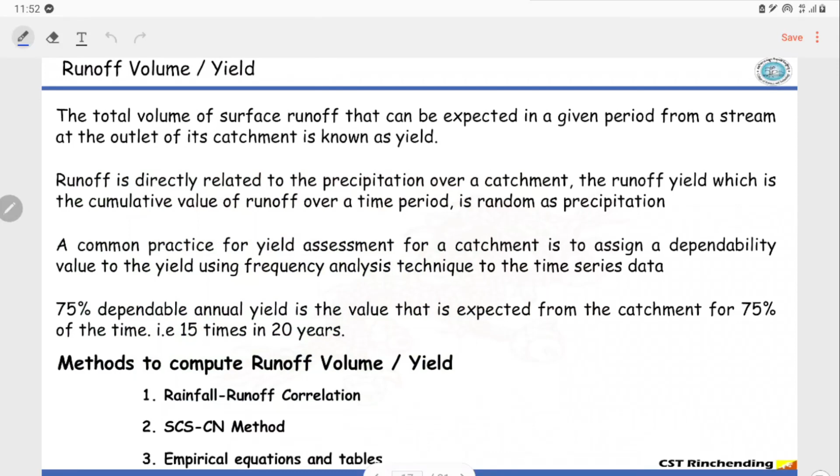So in today's lecture, we are going to discuss the runoff volume, also sometimes known as yield. As the rain falls over a catchment, after it satisfies the initial abstractions, the remaining water flows into the stream and eventually drains into the ocean, right? So how much water is being carried by a particular stream or river is what you call the runoff or yield of that river.

And like precipitation, this runoff is also random, because runoff is generated by a random input. Precipitation is random, and because of precipitation there is runoff. There is seasonality, but still the runoff is random. So instead of using parameters like average runoff, people usually use the term dependable yield.

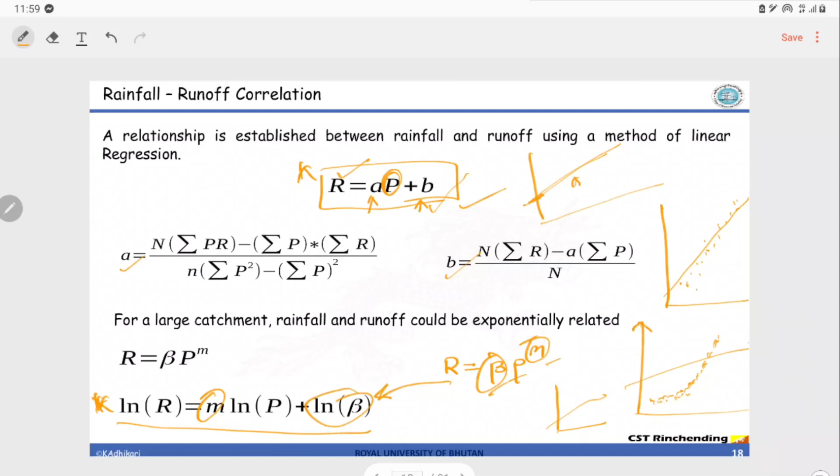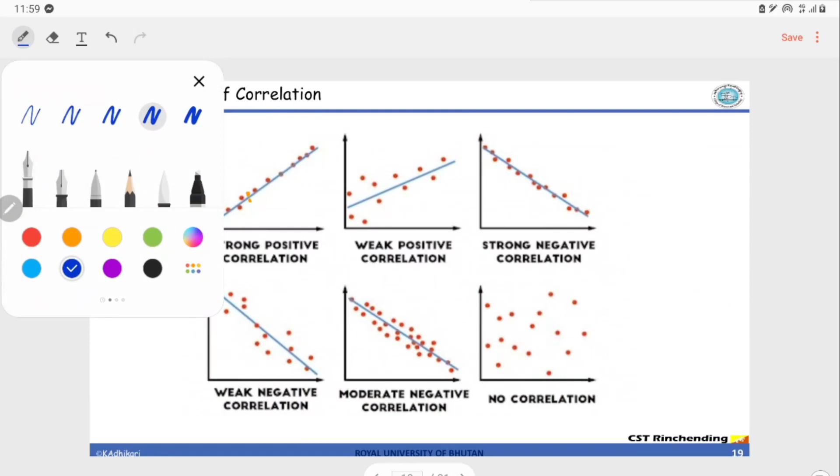Now let's look a little bit deeper into this concept. Let me use a different color, blue, a thicker one. If your data points are very close to this trend line, then we say positively correlated. Positive because when x value increases, y value increases. If the data points are not very closely located with the trend line, then we call it weak correlation. And we see the trend line: if y is also increasing with the increase in x, with the increase in precipitation the runoff is also increasing, then we call it weak correlation.

This case may not happen in rainfall runoff studies because this is absurd. Because runoff depends upon the rainfall. It cannot happen that when rainfall increases, runoff decreases. But if the data exists in this fashion, we say it is negative correlation. But for rainfall runoff studies, these conditions will never happen. This could happen depending upon the catchments. It could be sparsely located where you cannot fit a linear or a logarithmic trend line, but this kind of data can exist.

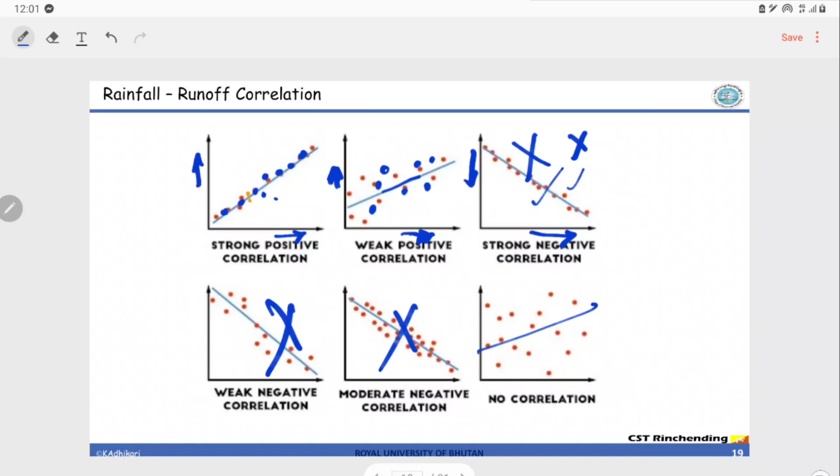But negative correlation, unless you are using the rainfall of one catchment and the runoff of a different catchment, which is absolutely illegal, there's no logic in it. So that time you may get this, but in the real world, for rainfall runoff correlation, you will never get this situation.

Now here we are on the SCS-CN method. It was first formulated by the Soil Conservation Service, United States, in 1969. Thereafter it has been widely used. In fact, like I explained in modeling, in most of the models it is inbuilt. The SCS-CN method is inbuilt in the model, so you can simply click to choose the method and then you can do the modeling.

It depends upon an assumption. It is a conceptual method, and it assumes that the ratio of actual retention, the catchment has some retention power, right? When there is rainfall, all the rainfall is not going to go as runoff. Something will be retained by the catchment. The ratio of actual retention to potential retention is equal to the ratio of actual runoff to the potential runoff. Now the volume of potential runoff would be equal to the rainfall, because potential runoff means if there are no losses, how much would be the runoff. So the volume would be how much rainfall has occurred, by mass balance, right? We can also use the concept of conservation of mass.

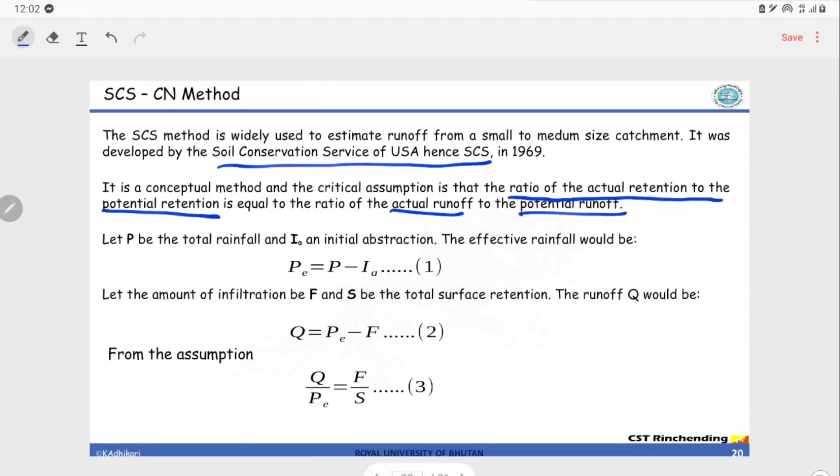So that much volume of water has come, that much volume of water has to leave, or else some mass is getting destroyed in between, which is not possible. So from here we have the first equation, that is the effective precipitation, which is the potential precipitation minus some losses, right? That is effective precipitation, effective rainfall we call it. Let's keep it as equation number 1.

And Q, which I'm saying as runoff, is equal to the effective precipitation, because I'm just subtracting the initial losses, okay? And then you have to subtract the infiltration losses. The initial losses and the infiltration together we call total losses, but here I'm doing it separately. So for rainfall, I'm simply subtracting the initial losses, because directly from the rainfall there is an initial loss, and for runoff, I'm subtracting the infiltration loss.

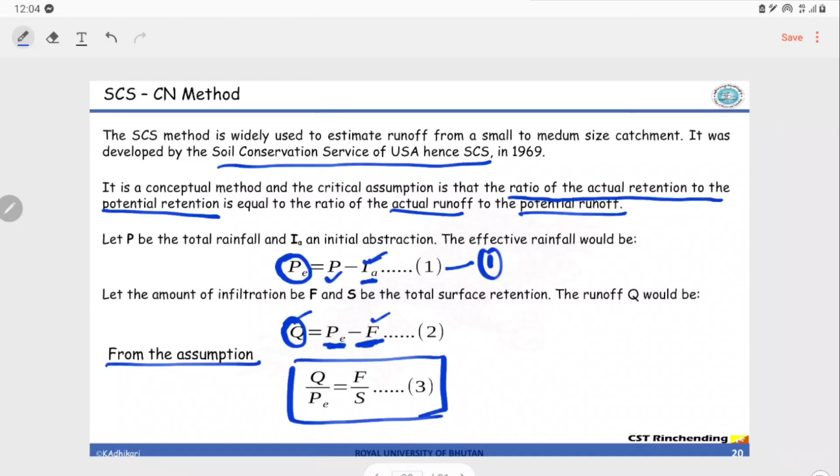So from the assumption, the ratio of actual retention to the potential retention is equal to the actual runoff to the potential runoff. From this assumption we can derive equation number 3. From this we again assume that initial abstraction is a fraction of potential retention. So here we are saying the initial abstraction is the total retention multiplied with a coefficient. What it says is Ia is directly proportional to S. Now Ia is equal to a coefficient times S. Okay, that's what's been done here.

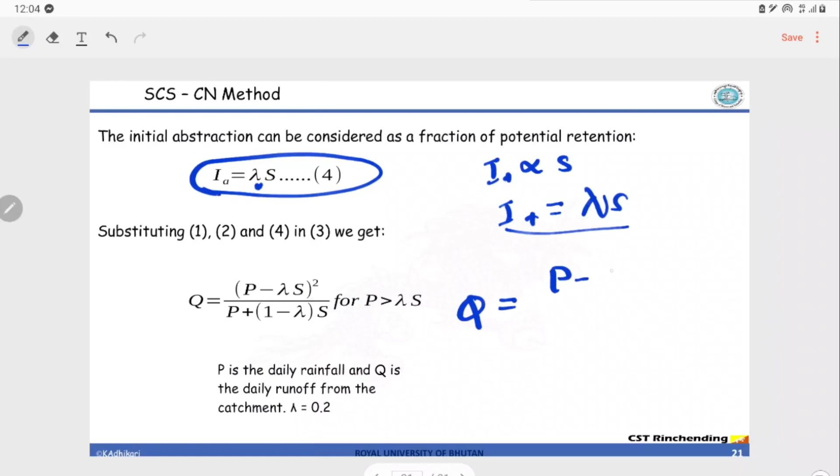Now using all these equations, we finally express our Q as (P minus lambda S) squared divided by P plus (1 minus lambda) S, where S is the retention, in other sense it is storage. And it is found from experimentation that lambda of 0.2 can be assumed. So in this equation you can simply substitute the value of lambda as 0.2. Precipitation, rainfall will be known. The only unknown value is the retention, that is the storage.

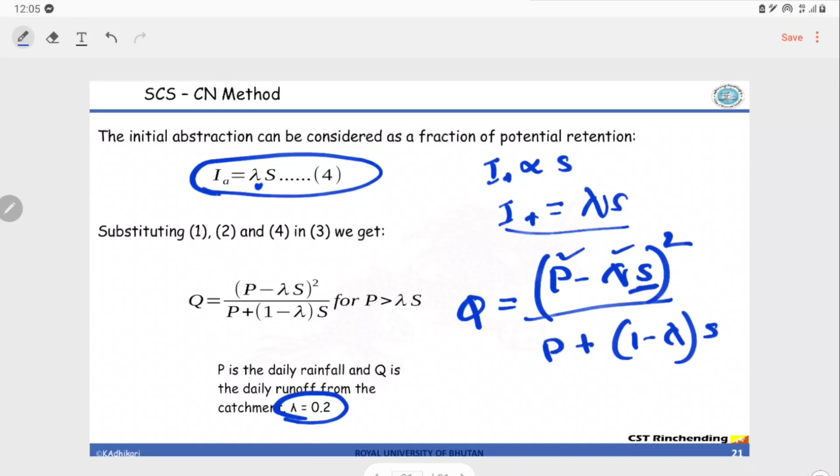Now a concept of curve number is used to calculate the value of that storage, and that's why it is called an empirical method, because this relationship has been derived from experimentation. You cannot theoretically derive this equation. It is derived experimentally by conducting many experiments in the field. So it is said that storage S is equal to 254 times (100 divided by CN minus 1), where CN is the curve number.

Now this curve number value ranges from 0 to 100, where 100 is for impervious surface. Impervious surface means there's 100 percent runoff. For natural surface, the curve number is going to be less than 100. For impervious, when there are no losses at all, we call it 100, or else it would be less than 100. This curve number depends upon the soil type and the antecedent moisture content of the catchment. We'll discuss what soil type and antecedent moisture content are.

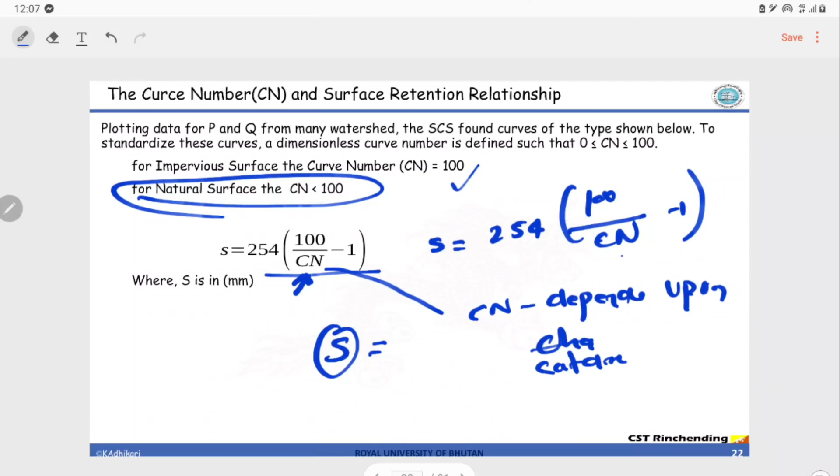So for now, what you need to understand is the storage S is equal to this function, whereby a new parameter comes, curve number. This curve number depends upon catchment characteristics. The curve numbers are usually available as a standard, so it depends upon what kind of soil and what kind of land use is there in your catchment. Depending upon this, the curve number is available in a tabular form.

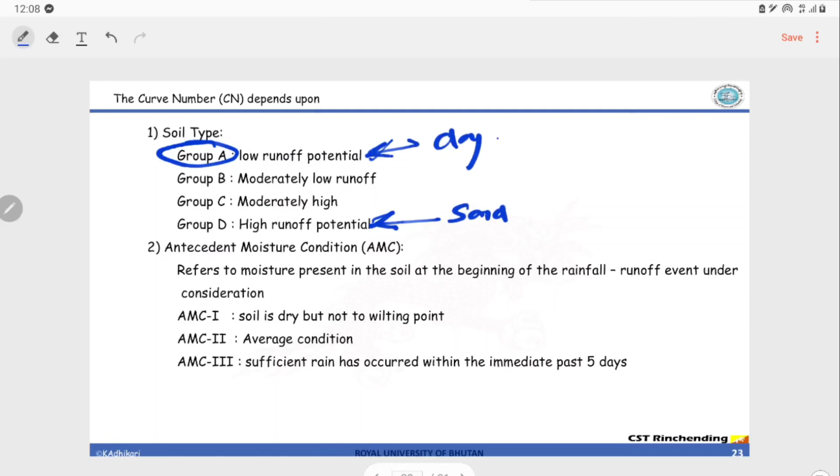And the curve number, as I said, depends upon the soil type and the antecedent moisture condition. If the soil is sandy, there will be less runoff, and sandy soil is classified as low runoff, under hydrologic group A. Hydrologically there are 4 categories of soil: A, B, C, D. A means low runoff potential. Sorry, the sand example that I was giving is for this one. High runoff potential is sand. This is for clay. If the soil is clay, then there is low runoff potential.

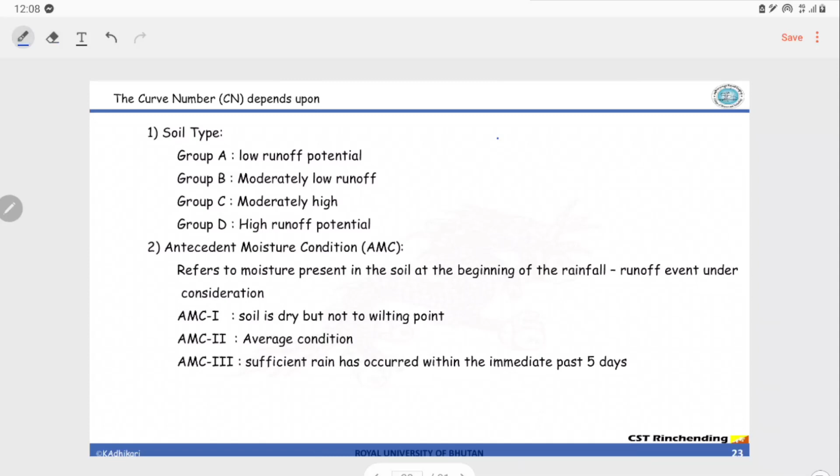Okay, let me repeat this. If the catchment area is sandy, because sand has a high potential of infiltration, the runoff will be less. So this is sand. If it is a clay type of soil or clay loam type of soil, then it does not have the potential to absorb the rainfall. So all the rain will drain as runoff, so it has high potential. So this is clay. Did you understand the logic here?

So once again, if the soil is sandy, it has a huge capacity to absorb water, which we call infiltration. So once there is precipitation over the sandy soil, a huge volume of water infiltrates, so the amount of water for runoff is less. So we call it low runoff potential. So it is classified under group A, sandy soils.

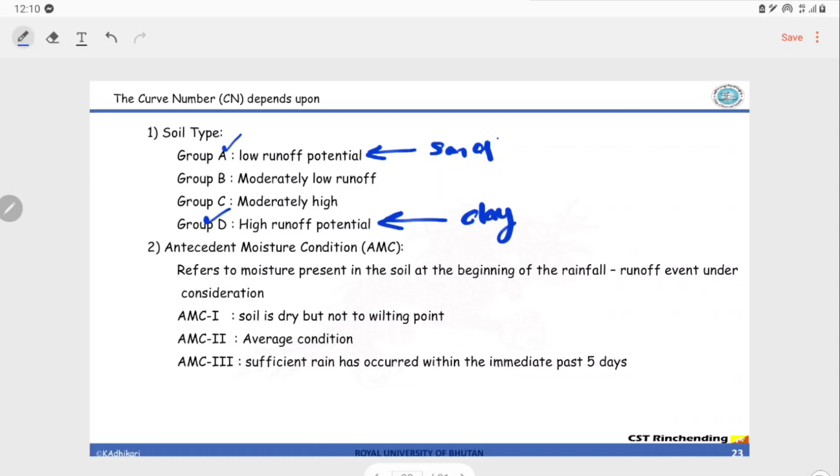And clay soil has less capacity for infiltration. So all the rainfall that is falling over a clay soil simply drains out as runoff. So it is classified under hydrological group D. Again, it depends upon antecedent moisture condition. Antecedent moisture condition means how much moisture was already available. Condition 1 is completely dry, condition 2 is average, and condition 3 is sufficient rain has occurred immediately before, which means the soil is completely saturated.

Now let's take the condition here. If the sandy soil is completely saturated, it also will have a high potential for runoff. This one already had a high potential of runoff. Whatever little capacity it had to infiltrate water, if that is also saturated, then even higher runoff will be generated. So, in a very simple term, the moisture content in a soil also affects the runoff.

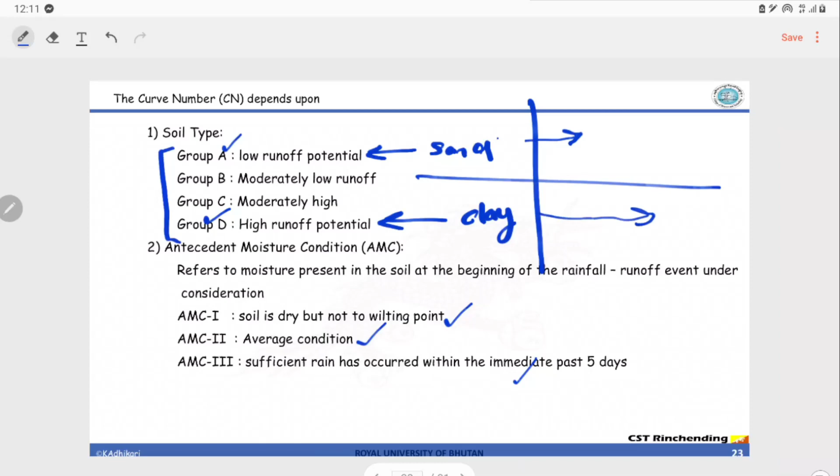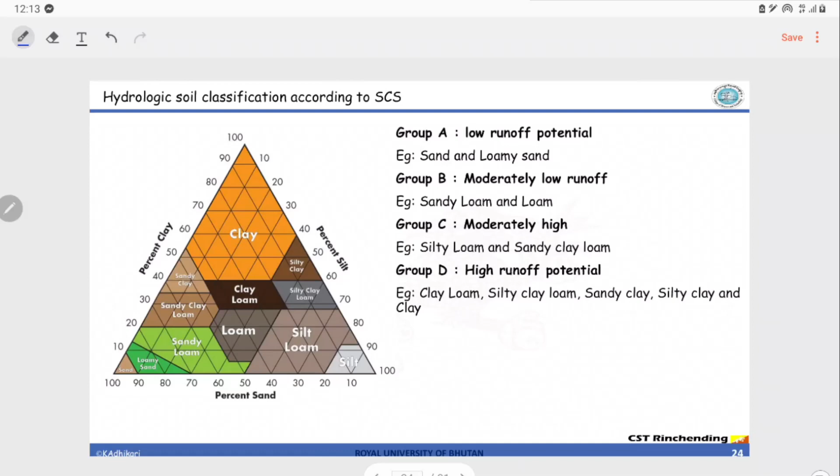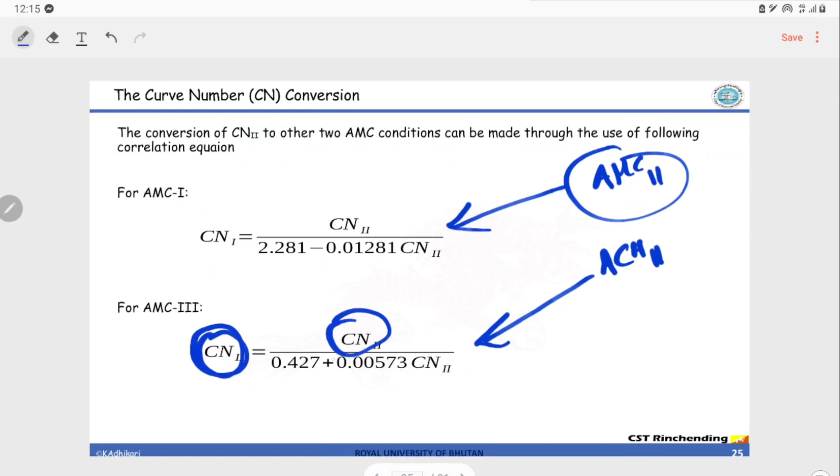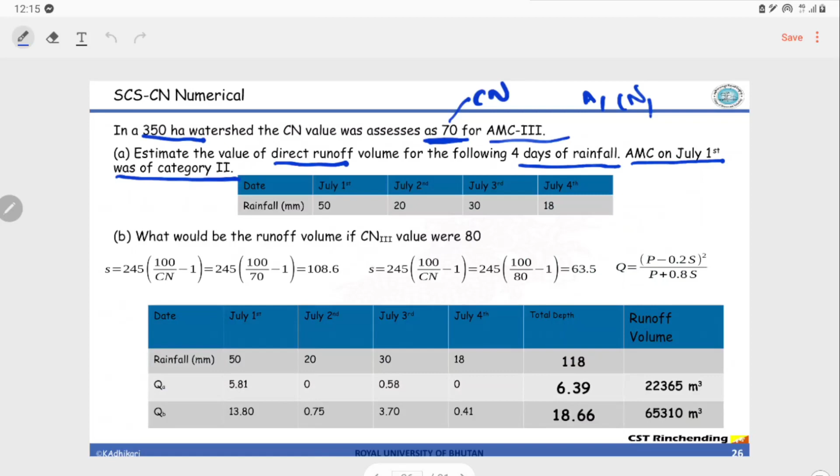AMC on the first day was of category 2. Now 3 is given, but it says for the first day the AMC was 2. So what do we do? We know 3 is given, but we are asked to calculate for 2, so we have to use this equation to convert the curve number to antecedent moisture condition 2. The rest is very simple. The storage is calculated by the given formula, 25400 divided by CN, where CN is 70, minus 254.

And then finally we calculate runoff by this equation. Runoff, you simply put P minus 0.2S in this equation, and then we generate runoff. But here for the first case, please understand that for the 1st July, the antecedent moisture condition was category 2, but the curve number value here is given for antecedent moisture condition 3, so you have to first convert that.

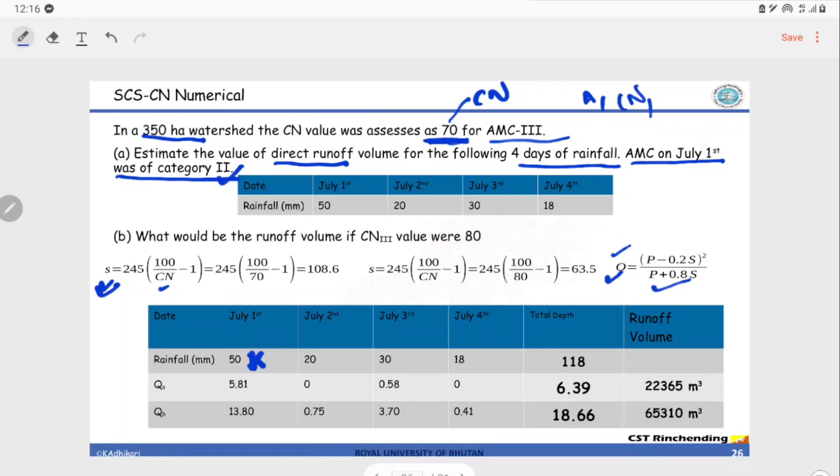Rest is straightforward. Calculate S, substitute the S in this equation for Q, and that's what is required. That's it. Okay, this is the SCS-CN method. We have discussed now the rainfall runoff correlation. We have also discussed the SCS-CN method. Now there are some empirical methods.

Empirical methods means, as I said, some experiment is conducted over one particular site, and based on the data the person who has investigated derives an equation. And it is said that for the Western Ghats in India, this equation can be used. For the Deccan Plateau, this can be used. We should not be using it. Okay, and there's another, Khosla's formula. Khosla's formula is very straightforward.

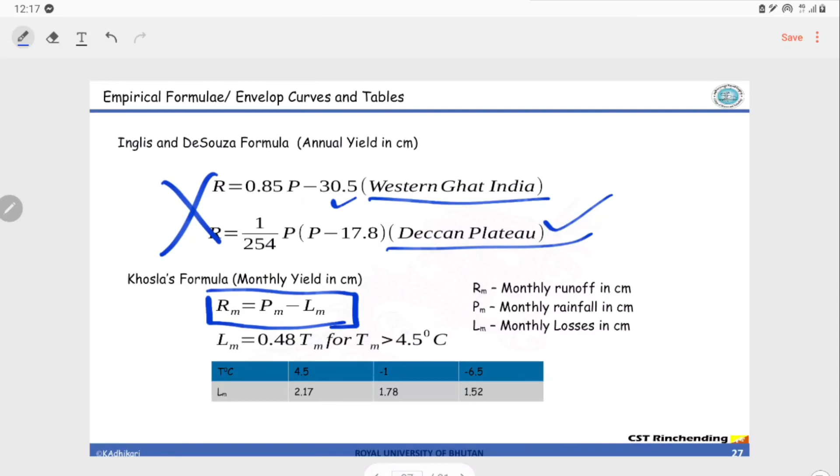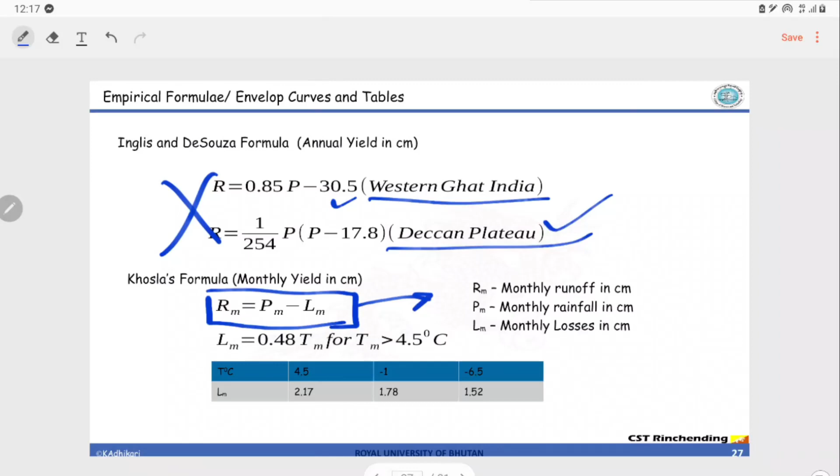He says that runoff is equal to rainfall minus losses. We know it, right? So that's what he did. But this is calculated with monthly rainfall in centimeters. You have to provide this in centimeters. And the losses depend upon temperature. For temperature more than 4.5 degrees, this equation is used. And the rest is very simple.

And finally the modeling. This is not included in your syllabus, but still I would like to touch upon this topic. Modeling here means, see, our real world is very complex. It has all the processes going on. Taking every nitty-gritty thing from the real world would be difficult. So what we do is we survey only the selected site, or a complete catchment wherever we are interested. Only this much catchment; we cannot do it for the entire world. So that catchment area is surveyed, and related information like data is taken out.

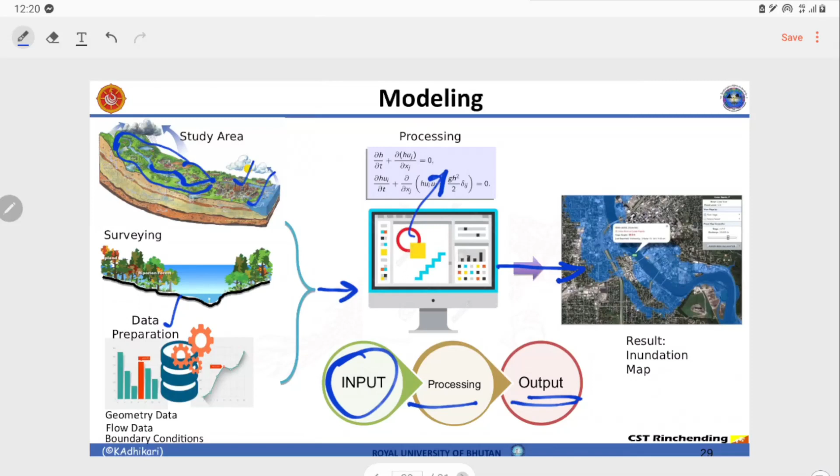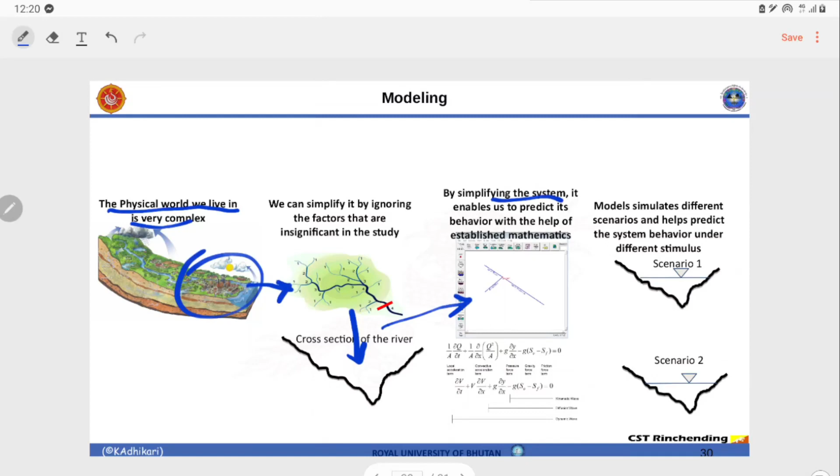So to summarize everything, the physical world we live in is very complex. We simplify it by ignoring the factors that are insignificant in the studies, and we take out only the required information. Simplifying the system enables us to predict its behavior with the help of established mathematics. Simplifying the system means we are simplifying the real world system. We have now simplified it, and then it's given as input to the software, and with the help of established mathematics like conservation of mass, conservation of momentum, the SCS-CN method, and so

many other methods, we do the modeling. And modeling can be performed for various scenarios, like what happens if this much rainfall occurs, what happens if the losses are less, what happens when the catchment changes. So based on different situations, we can do the modeling and predict what is going to happen. So with this, I would like to end this lecture.